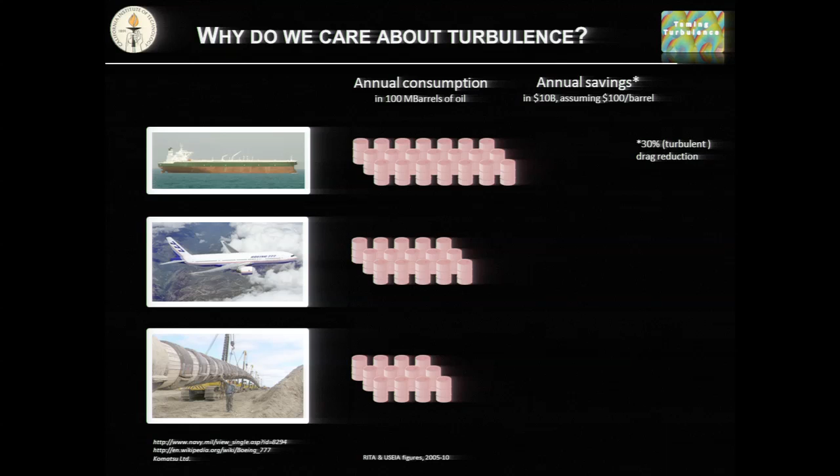But let's use that as a rule of thumb. The aircraft industry, Boeing, say you need at least 15% drag reduction for it to be an economically viable proposition to try and control the flow. So if we assume $100 a barrel and shoot for a 30% turbulent drag reduction, how much would we save? The grand total is $140 billion per year, only in these categories of flow I'm showing you here.

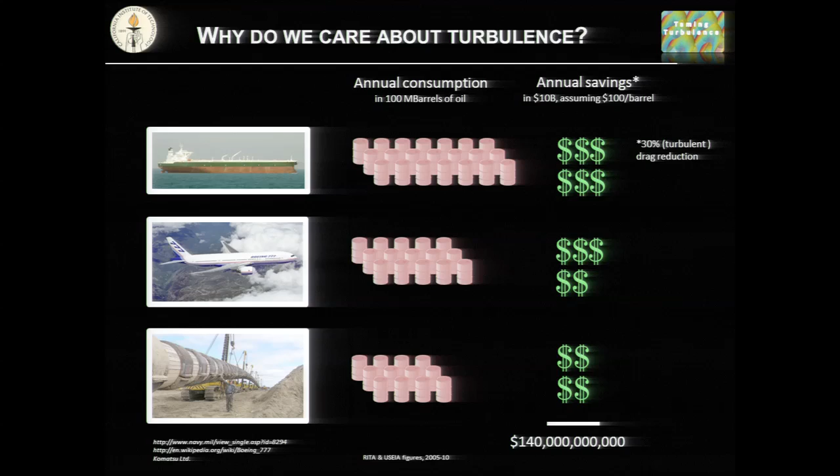Now, there are other categories we could think about. They're a little less clean in the sense that there are other factors at play. So these are the ones where turbulence is most dominant, but these are pretty enormous figures. The interesting thing is it doesn't matter how you're providing power to these vehicles—you may have read about biofuels being developed to power airliners. It doesn't matter whether it's a biofuel or Jet A fuel. If you can save up to 30% of whatever you're burning, that's a very significant effort.

And of course, there are other things that make us want to control turbulence as well. There are environmental costs, and noise is also associated with turbulence, jet noise, though not particularly close to the wall. But turbulence is a very interesting field, and it's also a very Caltech field. To quote one of the most famous faculty from recent years at Caltech, turbulence is the most important unsolved problem of classical physics. So that's a great challenge to work on as a professor at Caltech.

So when is a flow turbulent? I've told you a little bit about where the flow is turbulent. Let me tell you why it becomes turbulent now.

We'll start in 1883 with Osborne Reynolds, FRS, Fellow of the Royal Society, who published a paper: an experimental investigation of the circumstances which determine whether the motion of water shall be direct or sinuous—his term for turbulent—and of the law of resistance or drag in parallel channels. Here's his experimental apparatus set up in Manchester, England, with a very simple pipe flow arrangement where he controls the flow rate through the pressure head associated with this reservoir and a little valve here. Apologies for the quality of this—it's obviously quite an old figure from 1883.

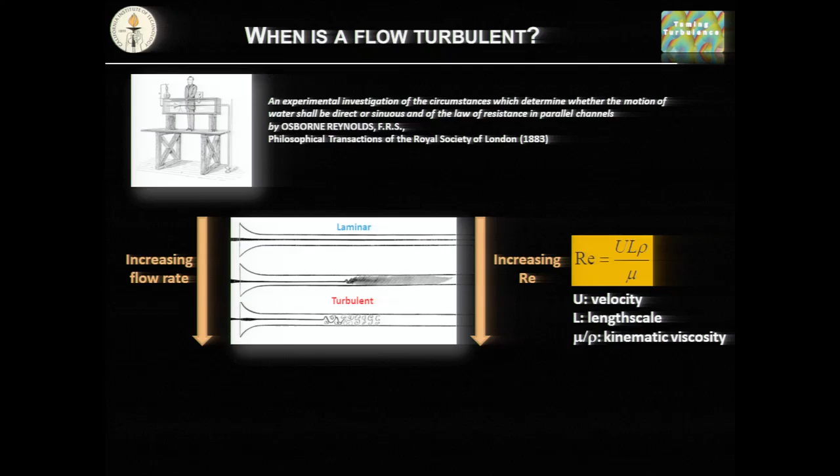As you increase the Reynolds number, at some point, inevitably, the flow becomes turbulent. The way it becomes turbulent is by amplifying very tiny perturbations that exist in the background somewhere associated with this flow. When the Reynolds number is low enough, the flow can damp out these perturbations. When the Reynolds number is high enough, it's a complex, fragile system that amplifies these disturbances, and things become apparently chaotic pretty quickly.

One other important thing about turbulent flow is that in a time mean sense, if I were to average this motion, I could come out with a mean velocity profile, and that's the thing that dictates the through flow rate of a pipe or the mean drag on a vehicle, and I'll explain that a little more as we go on.

But first of all, if we just take a cut through the pipe, the mean profile in the laminar case is parabolic, shown by this blue line here. In the turbulent case, you can see that it has a different shape. This red line shows the turbulent case, and it has a lower velocity on the center line of the pipe and a much higher velocity closer to the wall.

That's associated with the mixing, this three-dimensionality of the flow, mixing high-speed fluid from the core, the center of the pipe, towards the wall. It's particularly important because the drag, the skin friction as we call it, associated with this flow is dictated by the gradient of velocity at the wall.

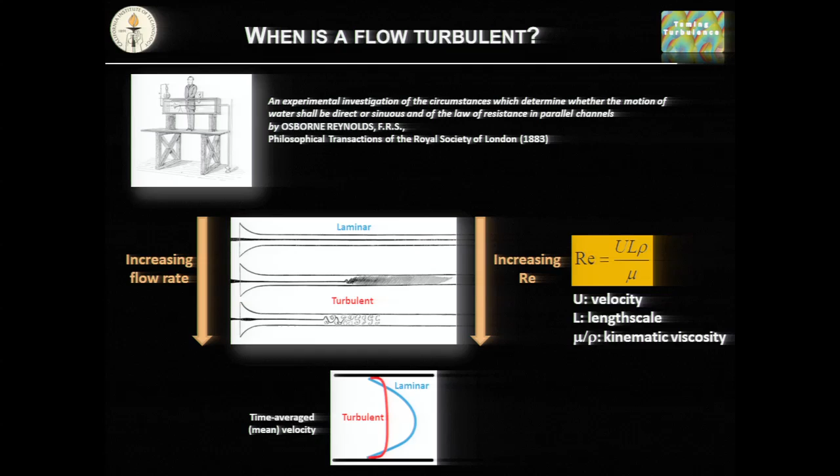So you can see that for the red case, there's a much higher gradient of velocity and therefore much higher drag. In pipe flows typical of industrial applications, you can have drag that is orders of magnitude higher in the turbulent case than in the laminar case if you try to get the same throughput in the pipe. So there are two ways to think about this: if I want the same throughput in a pipe, I need to work much harder in the turbulent case. Or if I fix the power I want to put in, I'm going to get much less flow coming through the pipe.

You may have encountered turbulence. If you poured a glass of water from the faucet, you already know a little bit about this transition. If you turn the faucet on just a little bit, the flow comes out very smoothly—it's a laminar flow. If you turn up the flow rate, you start to see a turbulent jet. It's not a wall flow in the sense I'm talking about here, but you're probably familiar with this phenomenon.

Now let's talk about how we observe turbulence. As Professor Ravichandran introduced, I'm very familiar with laboratory and field experiments in turbulence, in wall turbulence. On this spectrum of Reynolds number—a definition I gave you earlier—here's the division between laminar and turbulent. The work of Osborne Reynolds sits to span both conditions through the transition from laminar to turbulent. Down here, I'm not going to talk about laminar flows much, but things like blood flow and flow around bugs and birds reside in that section of the diagram.

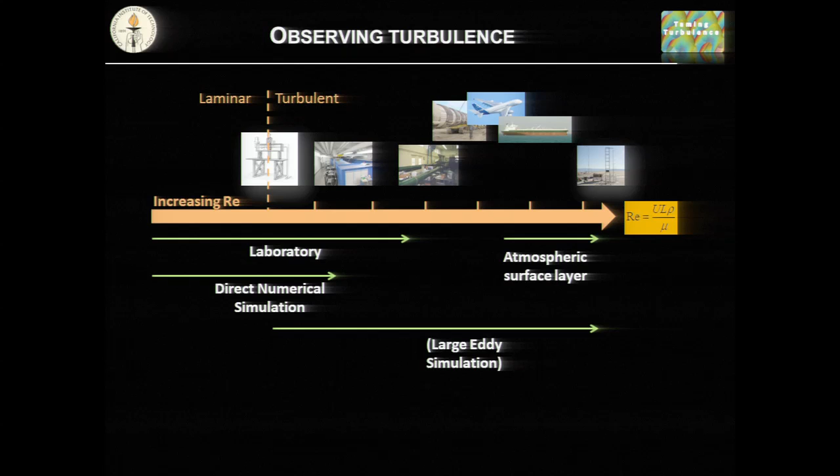So there is a big gap here, unfortunately, just about where some of these applications sit. And it's not just a big gap on my diagram, it's a bit of a gap in our understanding of the way turbulence works too. You would think being able to make all these measurements in controlled facilities, we would know how turbulence behaves. It's very complicated. That's why 130 years after the transition to turbulence and the Reynolds number was really introduced in a formal way, we're still working on it. Let me show you a little bit of why.

Turbulence is three-dimensional, it's chaotic, and yet structured. What do I mean by that? Well, here are some time traces of the velocity. This is actually from the surface layer of the atmosphere, and this is 10 seconds of time, and these are 4 time traces, a factor of 10 difference in height from the wall. This one is at a log of the distance from the wall of 1, so that is about 5 millimeters from the surface of the Earth. This one is about 50 centimeters, 5 meters, and further up than that. So what do you see here?

Well, you see a lot of activity. Looks like the type of thing you don't want to see when you go have a cardiogram done, right? There's a lot of very small-scale, rapid fluctuations, and there's some large-scale activity too. These are synchronous time traces, so you can see there's something interesting going on between about 82 and 86 seconds here, something a little more quiescent in the signal. There's a large-scale negative excursion below the mean. These are all fluctuations relative to the time mean, and it seems to be correlated across these heights. There's a variation in the activity of the turbulence level between these periods as well. So there's some kind of structure that you can see visually.

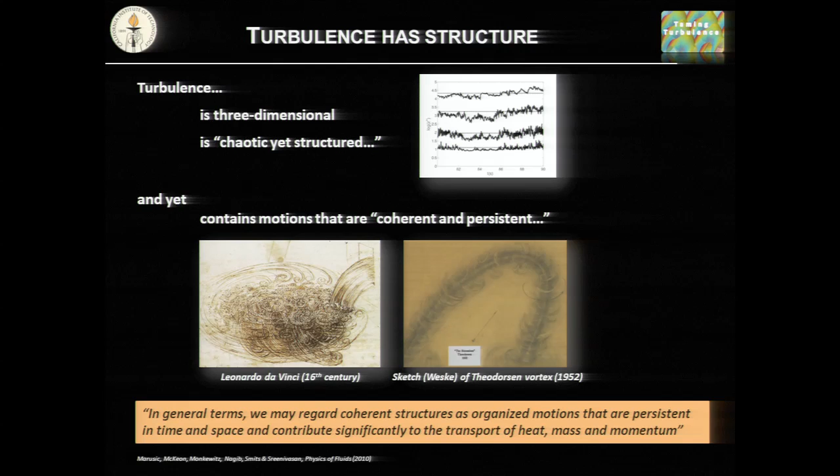It's still somewhat controversial how clearly we see these things in wall turbulence, but it turns out to be a very useful building block for understanding wall turbulence. These are coherent motions - coherent structures, organized motions that are persistent in time and space, so you can see them, and they contribute significantly to the transport of heat, mass, and momentum. So they're dynamically important, and they stick around long enough for you to see them.

Of course, wall turbulence has some special structure. I'm going to walk you through a snapshot of the history of this and some of the observations of turbulence we're familiar with. Hopefully you'll see there's a great history at Caltech - in fact there are so many contributions from Caltech I won't be able to put them all on the slide. So consider flow over a flat plate.

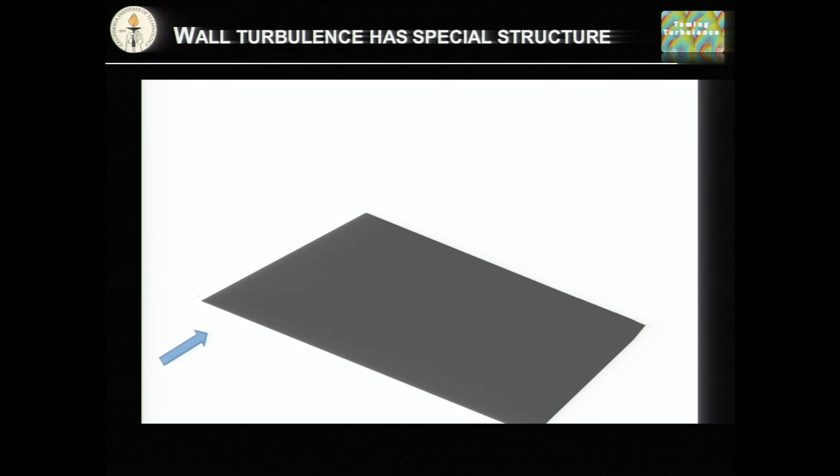Here's the plate, here's the direction of the flow. When I describe to my non-scientific friends what I do, I can say I study flat plates with air flowing over them - doesn't sound very glamorous, so you have to use your imagination. Think back to the large things I started the talk discussing. But here's the flat plate - this is the type of thing we like to put into a wind tunnel because it's a very simple configuration.

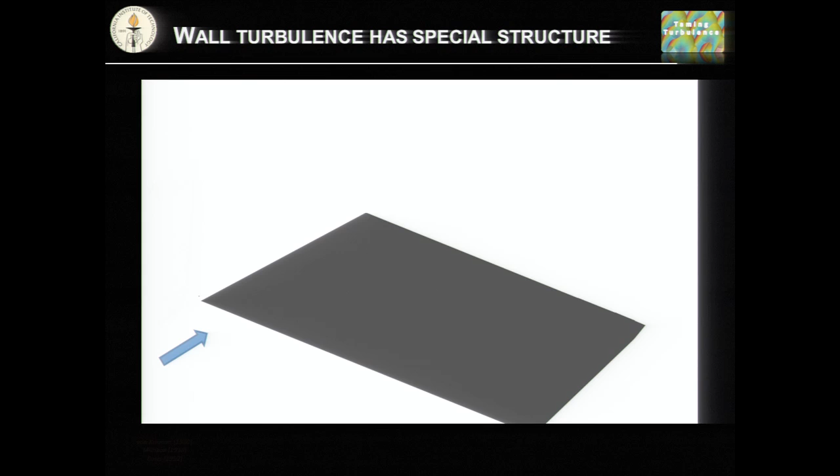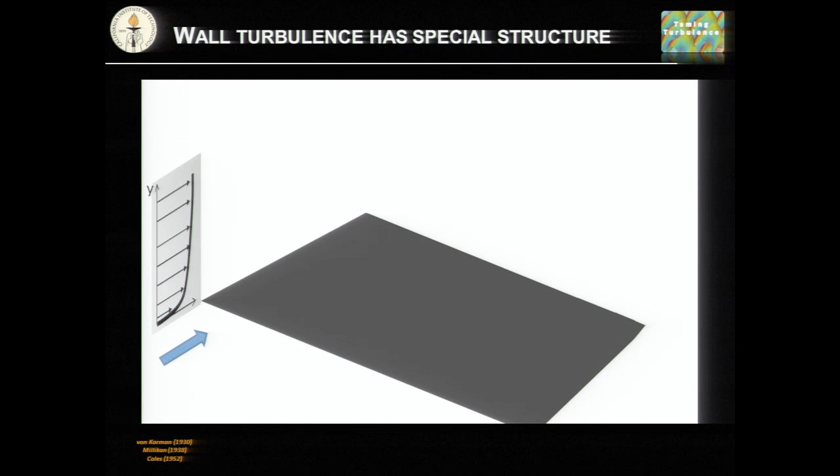Early on, people understood the profile of the mean velocity - the time mean. Remember that the gradient of the velocity, here's the velocity curve, the variation with distance from the wall y, and the gradient here is what dictates the skin friction, or shear stress, the drag associated with the flow. There were contributions from Theodor von Karman, the first director of the graduate aerospace laboratories at Caltech, aeronautical laboratories as they were then, in 1930; Clark Millikan, second director of GALCIT; and Don Coles, current emeritus faculty at GALCIT. There are many others on campus - my apologies if I ran out of space on the slide. So that's the mean, but the mean velocity tells us the least about what the turbulence itself is doing.

So in 1967, Kline et al. did some very nice experiments where they were able to visualize a bit of the turbulent motion. This is a visualization technique called hydrogen bubble visualization - there's a thin wire, with three planes, so the wire is put at three different heights from the wall, and hydrogen bubbles are released from the wire.

It's better to start up here - you can see these nice straight lines of hydrogen bubbles, which are illuminated so you can see where the bubbles go. If there's no turbulence, everything's laminar and smooth, the bubbles travel in straight lines, and you'll see the same striations close to the wire. Now if we go back to the plane closest to the wall, you can see that's not the case - there's some very intense motion moving these bubbles around.

Close to the wall, the bubbles get grouped into what we call streaks - that's consistent with motion parallel to the wall, grouping these bubbles together. Then these bare bits here are consistent with motion out of the plane or into the plane, so wall-normal motion. We understand now, and some of these authors were able to suggest these ideas, that there are vortices aligned with the plate moving these bubbles around, and that's a very important mechanism close to the wall.

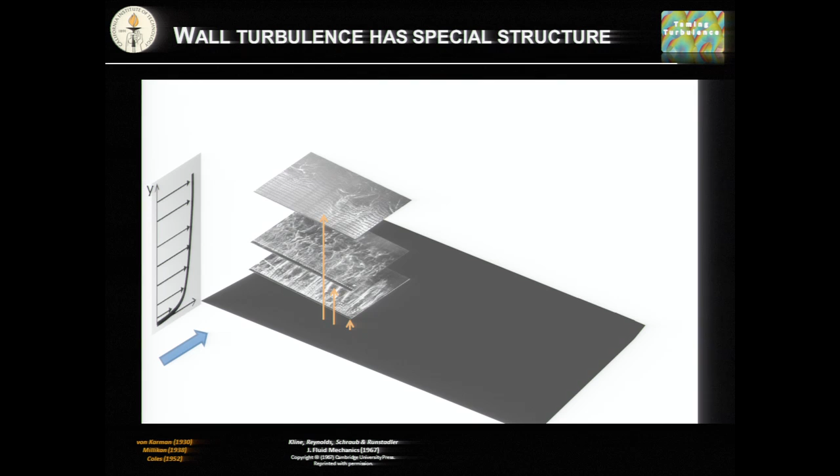These bubble lines are undisturbed, and then you get some intense activity here.

With the advent of laser technology, the community was able to make additional observations of turbulence. Here's a beautiful image where dye was introduced to a water boundary layer and illuminated with a laser. The time mean masks a lot of intricate features associated with the edge of the boundary layer. There's what we call an intermittent edge, so it doesn't just sit at a constant height. The yellow demarks the fluid that is turbulent in the boundary layer, but sometimes there are excursions of unmarked fluid right down to about half the boundary layer thickness. So you can see why this top plane looked relatively unperturbed, because it was mostly out of the boundary layer, and then occasionally it would intersect with one of these lumps or bulges, as we call them in the flow.

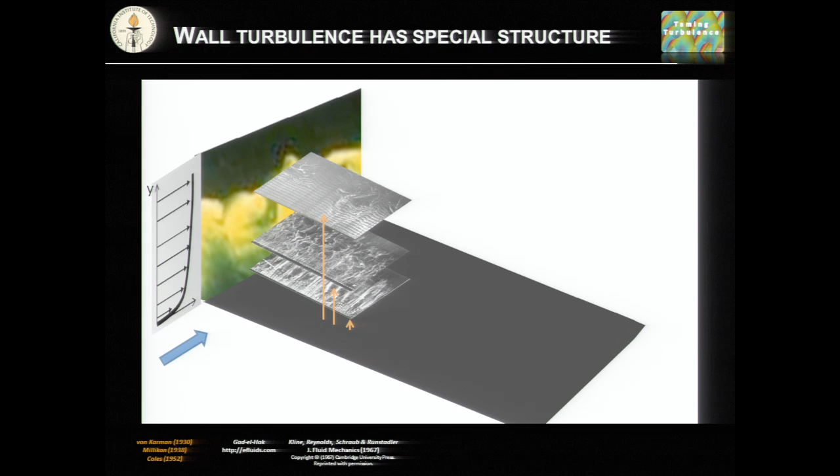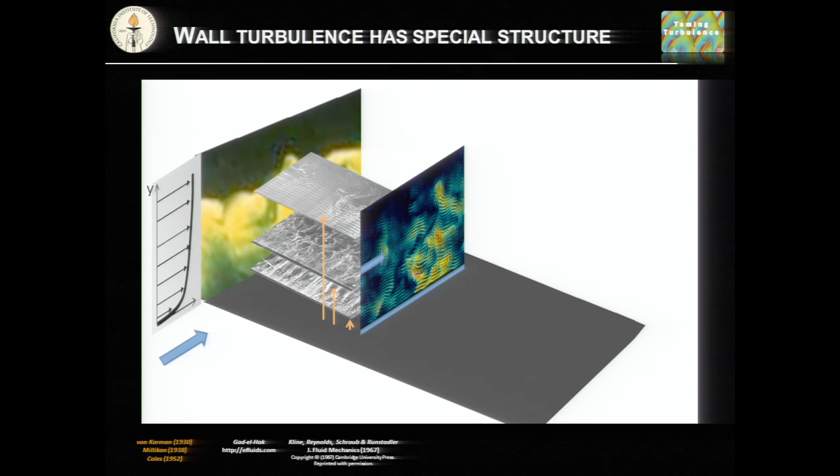We're getting some picture together of what the boundary layer actually looks like. We can go a step further with a technique called particle image velocimetry, which I will sketch out shortly. For now, this is an image of the velocity field in a wall-normal streamwise plane, where these colors show arrows indicating the velocity of the fluid in that plane, streamwise or wall-normal, and the colors dictate the intensity, or amplitude of that fluctuation. So you can see it's pretty complex.

If we look at a similar technique in a wall-parallel plane, about the same height, the arrows show fluid moving slowly relative to the mean in a turbulent sense, very complicated snake-like shapes here. The colors show the footprint of vortices, of swirling motion in that plane. They're dotted around. Red is clockwise and blue is the other way. Blue is clockwise and red is anti-clockwise. But there is some kind of grouping of these around these low-speed structures, and that's a feature we see quite often.

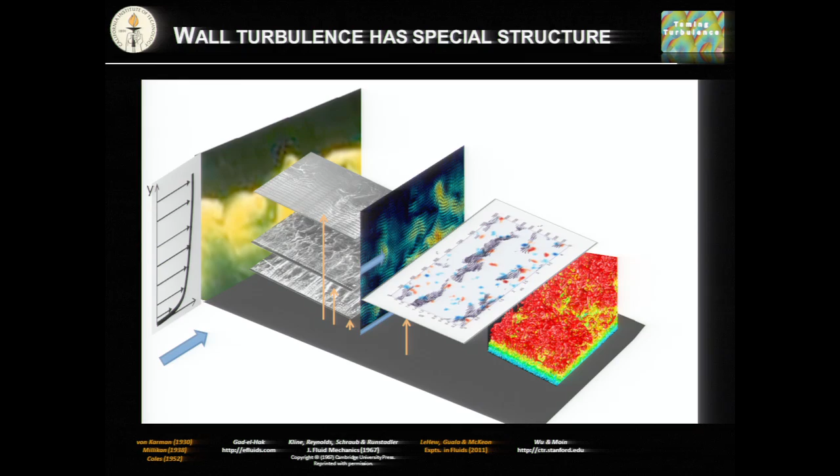The last piece in the puzzle here is direct numerical simulation. What's that? Well, it's been described as a forest of hairpin vortices or a sea of worms, depending on how you want to describe it. But this is the output from a full simulation. Every scale is replicated, and you're seeing here the vortex structures, the swirling structures picked out of this simulation. They're colored by the speed of the fluid at different heights from the wall. So if you get nothing else from this picture, it's complicated, okay?

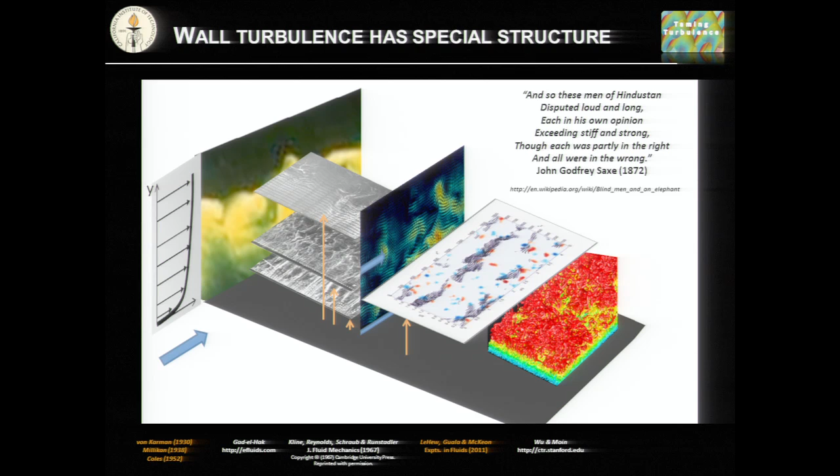So how come we haven't made so much progress in this field? I love to cite John Saxe's famous poem about the blind men describing the elephant. These men of Hindustan, read the community, disputed loud and long, each in his own opinion exceeding stiff and strong, though each was partly in the right and all was in the wrong. If you imagine trying to describe an elephant, you're seeing one of these views and trying to extrapolate and understand the whole flow. Even when we have all of these images associated with the flow, it's still hard to understand what the flow is doing, and particularly to extrapolate that understanding to geometries and flows different from this lovely flat plate. Remember, you're using your imagination—it's not just a flat plate, but even so, to more complicated flows. And particularly, it's hard to extrapolate to higher Reynolds numbers.

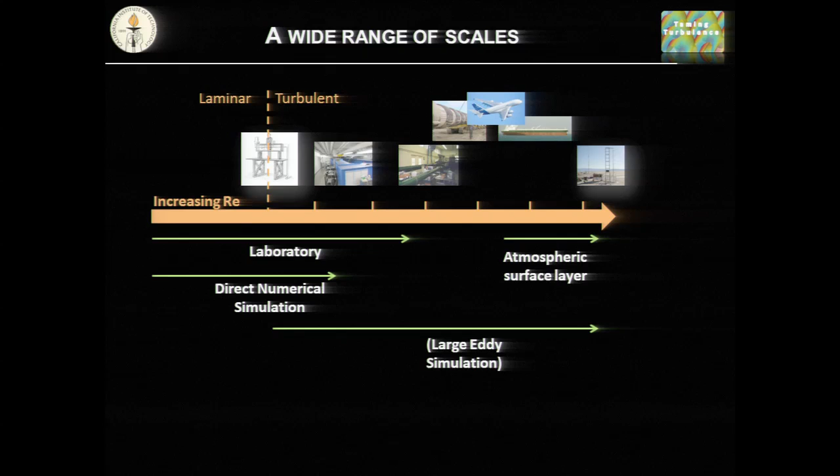So if we go back to the range of scales, I'm going to tell you a little bit about why it's hard to extrapolate in terms of Reynolds numbers. If we consider this wind tunnel laboratory facility, the plate we work with is about as high as from my feet to the tip of my finger, so about 2 meters long. The boundary layer, that region in which the turbulence is confined, is about the height of a golf ball. So it's already a pretty big range of scales. If you want to understand the whole flow, you need to make measurements over that.

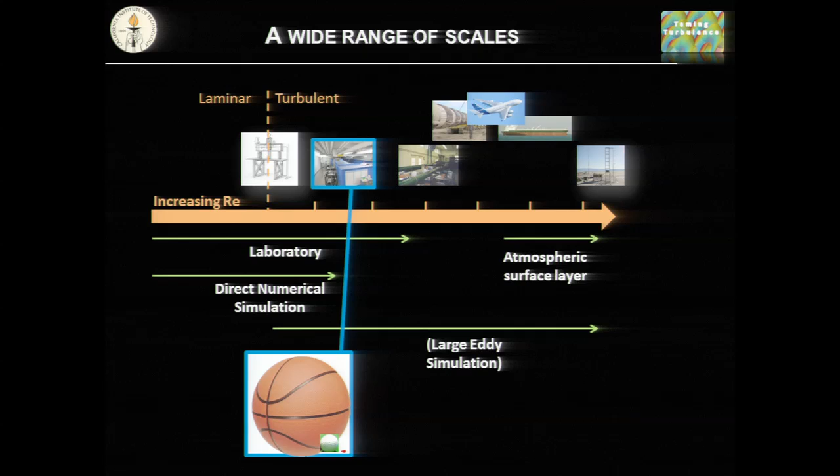It gets worse, okay? So let's now think about the world's largest supertanker, the Seawise Giant. It's actually out of commission right now, but it was 458 meters long—that's the height of the Empire State Building, okay?

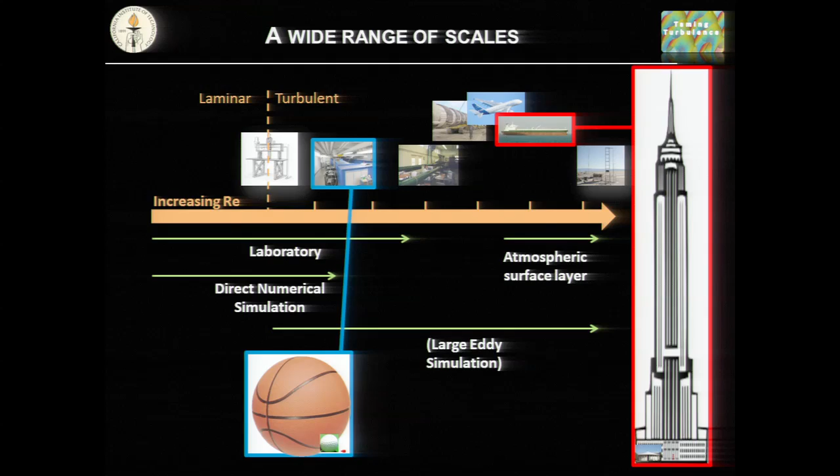So if you want to simulate the flow around that, that's a pretty big simulation right there. Now, the boundary layer on that, see this little red person? That's the tallest female US citizen, Sandy Allen. She was 2 meters and 24 centimeters tall. That's almost exactly the thickest boundary layer that you would observe on this very large tanker.

The longest scale of motion in the turbulent boundary layer is the height of this auditorium, 20 meters. The smallest scale is thinner than the thinnest of Sandy Allen's hairs. So you need to be able to measure, see, resolve, simulate from the thickness of a hair at least to the height of the auditorium. And if you want to understand more than just a little piece of this flow, you want to be able to simulate up to the top of the Empire State Building. So again, if you take nothing else from this slide, this is difficult.

So I've told you a little bit about the economic and the environmental drivers to control flow. So it seems as though there's a lot of promise here. We ought to be able to do quite a lot.

So what do we need for a flow control scheme, a way to make the flow do what we want it to do? Well, the first thing is it needs to be efficient, and you'd be surprised how many people fall at the first hurdle here. So any scheme to control a flow, to try and reduce the fuel burn or the energy associated with a vehicle, needs to use less power than it saves. Think about it, it's important.

There is some element of science versus engineering here, so even showing that you can control flow is quite a significant step forward at this point, but if it's ever going to go into application, you can't violate that first one. The scheme needs to be adaptable, so it needs to work under different flow conditions. We think about individual flow speeds in the wind tunnel, and that's a very nice laboratory setting, but of course that's not what happens in the real world. And it needs to be robust, so wind gusts on an aircraft, that sort of thing.

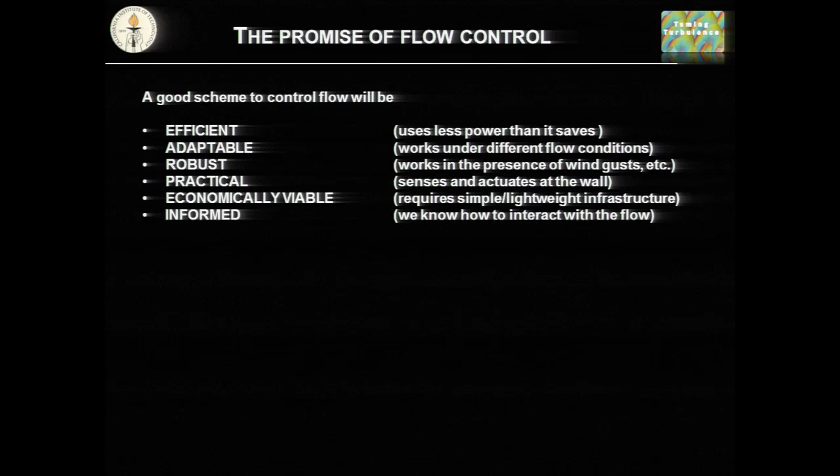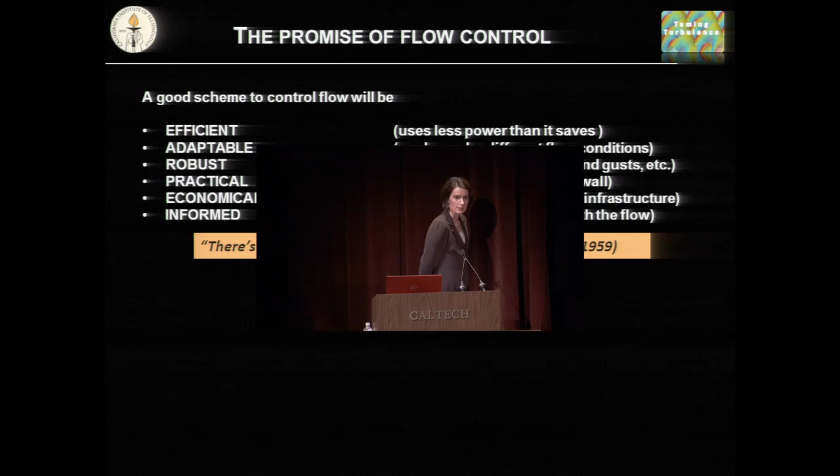It needs to be light and simple to make it economically viable. And the hardest bit really is that it needs to be informed, so we need to understand some more about the flow to really make this a practical idea. To quote Feynman again, there's plenty of room at the bottom, so we can make things that are small enough to interact with these smallest of scales in the flow. And here are some examples.

So on the left are active dimples. These little circles in a wafer, this is a 4-inch wafer, these guys are flat until you actuate them, and then they look like little blisters. They pop up. So if you think of a dimple on a golf ball, this is going the other way, so this is really a pimple. So dimples down, pimples up. These are active dimples, one way of interacting with a flow passing over the top.

But to do that, you need this pattern of electrodes. It's a very intensive manufacturing process, but you can do it. And these are a few millimeters across, you can make them smaller. On the left, that was work from Imperial College London. On the right are some sensors, nicely photographed to give you a sense of scale. These are of the order of 0.5 millimeter in diameter, or in cross-section. You can make them down to a few tens of microns in cross-section.

These are shear stress sensors, little floating devices, and as the fluid exerts a force on them to move them in plane, you get an electrical signal out from little tiny strain gauges that tell you what that force is going to be.

What's the problem? Well, here's the A380, one of the largest commercial airliners in use right now. If I actually want to control everything on this airliner, then I need both actuators, there are many other options, and sensors, in a pattern, a repeating pattern that's somewhere between 1/4 of a millimeter in scale to 1/10 of that. So very, very tiny units that contain at least one sensor and one actuator each. If I cover the whole aircraft, so just fuselage and wings, I need, any guesses? 20 billion.

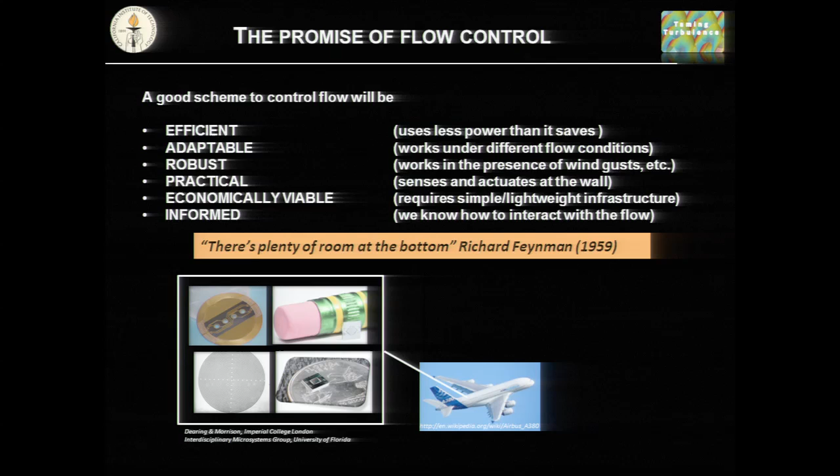I like to call this the fitting the squid into the box problem. While I'm busy concentrating on this arm, there's no guarantee that this leg is not coming out of the box the other side. So if we want to do something like this, I would argue we need to understand the physics some more.

One of my favorite expressions since arriving at Caltech, and this is sometimes used in the context of trying to get Caltech faculty to meet, is herding cats.

So on the left here, think of the cats as individual parcels of fluid. I want to force them to do something that I want them to do, in this instance, get them into a pen. These cats all have things they want to do, whether it's go eat, chase this lovely looking mouse, or sit on the cushions in the sun. If I want to get these cats to go into this pen, I probably need at least one person to move each cat, because I'm trying to get them to do something they don't want to do.

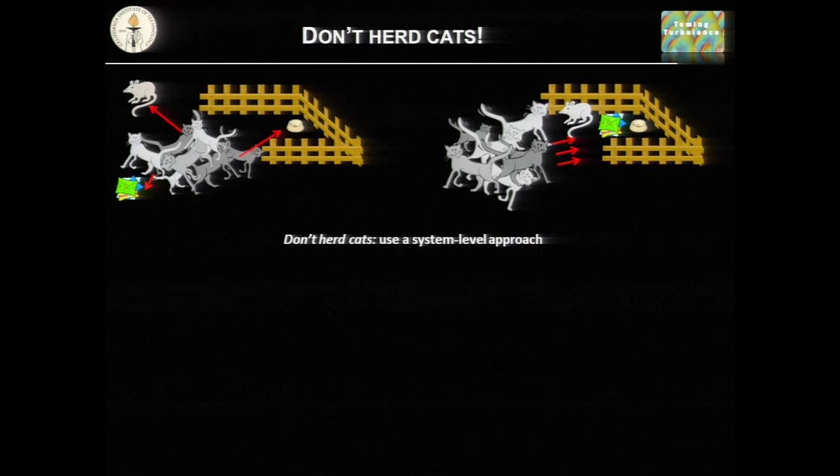So don't herd cats. Let's use a system-level approach, understand what the cats actually want to do, and encourage that. If I were to move the mouse, the pillows, and the food into the pen, then the majority of cats would probably go that way. There's always one, right? So it's not a one-person job, but it's certainly easier.

So the idea here is rather than use the hammer approach of billions of sensors and actuators, I want to tickle the flow. I want to just move it slightly, make it think it's doing what it wants to do, but actually have it do what I want it to do. So to do that, we harness something that's innate to the flow.

One of the tendencies of the flow we already know about is to respond acutely to surface roughness. Here are some examples. This is an Arleigh Burke-class destroyer in the US Navy, shown here in dry dock. You don't get a lot of detail, but hopefully you can see there's all sorts of what we call biofouling. These ships go out to sea clean, and during sailing they get weed and little creatures attached to them, which in my language is roughness. So the surface that was nice and smooth becomes rough. The Navy has a categorization for the different types of biofouling you can observe.

Fouling rating 30 is heavy slime. Sounds pretty unpleasant, but it's actually seagrass and lovely little creatures called sea squirts. Then higher up is fouling rating 60, these are small calcareous fouling or weed, barnacles with a quarter inch height or less. So still pretty small deposits on the surface of the ship.

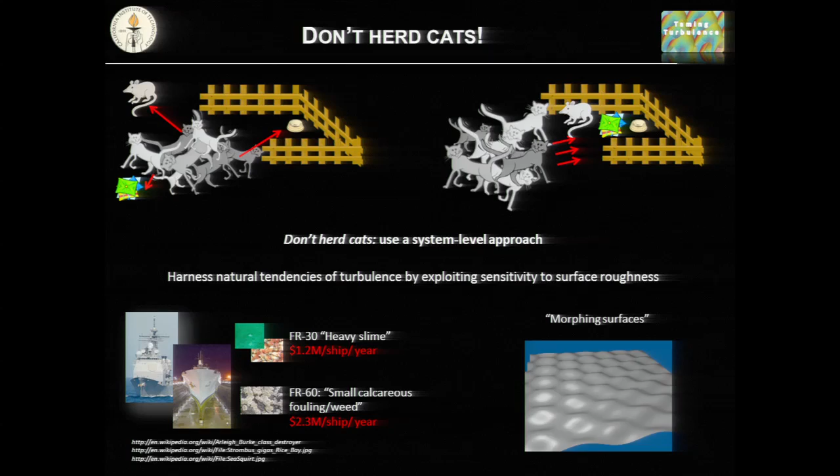So here's a little cartoon to keep you in mind of what I was saying. Very simplistic, in that there's one scale in both the streamwise and cross-stream direction, and this amplitude oscillates in time. We call these morphing surfaces. I'll tell you more about how we make these later on, but this is how we're going to try to interact with the flow.

Let me skim through how we decompose turbulence first. Here is a velocity trace, the streamwise velocity fluctuation in a water channel here at Caltech, with distance along a surface. If I wanted to characterize that, my human brain can't really process exactly what that trace looks like. So if I want to break it down into known quantities so I can compare it with other flows, I might try to say it looks kind of like that green trace as a first approximation.

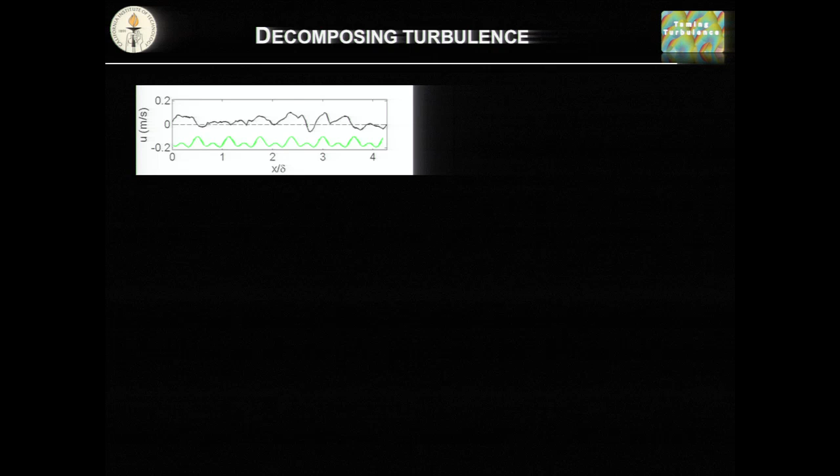You can see that green trace approximates quite well for some regions of the flow and gets it wrong elsewhere. If I look at the blue trace, a very simple sinusoid, that does better here, worse there. But if I sum them together, I get a more complicated pattern. You can imagine doing this with increasing numbers of simple waves, sinusoids.

All I need to record is the amplitude of each wave and the phase, meaning where the first peak occurs in space. There's a theory, I won't bore you with the details, but it tells you that you can exactly reconstruct the signal with the right number of samples as a summation of this type of wave. So if I record these waves, I can match different signals and pick out patterns that I can't pick out with the human eye.

Problem is, that's a one-dimensional velocity signal, in one dimension in space, but there are three dimensions. And I have no time information in there.

So here is what the velocity field looks like at 30% of the boundary layer thickness, 30% of the full region of turbulence from the wall. This is the trace I showed you on top, and it corresponds to the velocity along this line here. This is streamwise distance, this is spanwise distance. Red means a velocity fluctuation higher than the mean, blue means one slower than the mean.

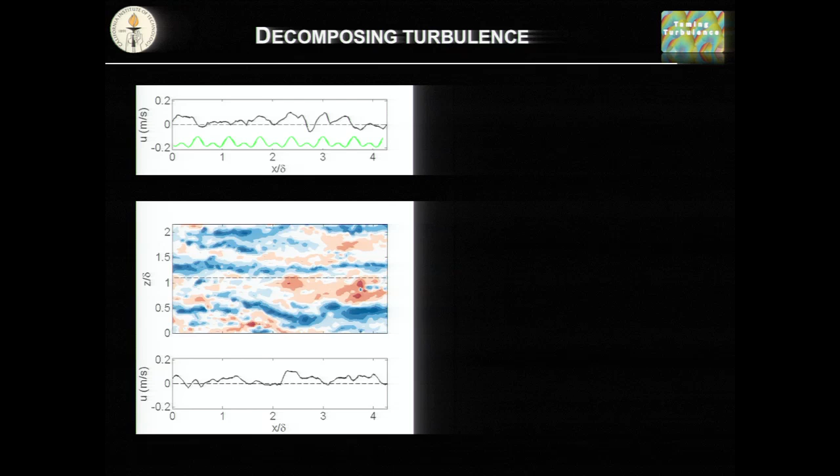So if the movie runs, here we go. This is time information, much slowed down. This data was obtained at 1,000 cycles per second. Hopefully you can see that things are complicated up here, but also that while some features convect, meaning the shape just travels downstream - this peak is pretty much just traveling downstream - there's also what we call evolution, where the shape is also changing in time. So I also need to account for the time variation.

If I'm going to think about this flow in terms of traveling waves, I need to be a little smart. You may be familiar with the simple wave equation that says the velocity of a wave is given by the product of the frequency and the wavelength.

So here are some very simple waves. Here's wave 1, which has twice the wavelength, the distance between peaks, that wave 2 does. If I add them together and they have the same convection velocity, I get something that looks like this. If I add more waves, I can get very complicated shapes. This is the type of idea behind acoustics, where all signals travel with the same speed, the speed of sound.

However, there's no evolution of this signal. So if I want evolution, I need to consider waves that travel at different velocities. Here's one where wave 1 is traveling at twice wave 2. If I sum them, I get a signal that's evolving in time. Again, if you put enough frequencies together, I hope I can convince you that you get back to something that looks like this. So how does this help us?

Well, we need to extend this to have wavelengths in the streamwise direction, the spanwise direction, a frequency and time, and since this is 2-dimensional, I need to think about the direction out of the screen as well. So it's pretty complicated, but it turns out to be quite useful.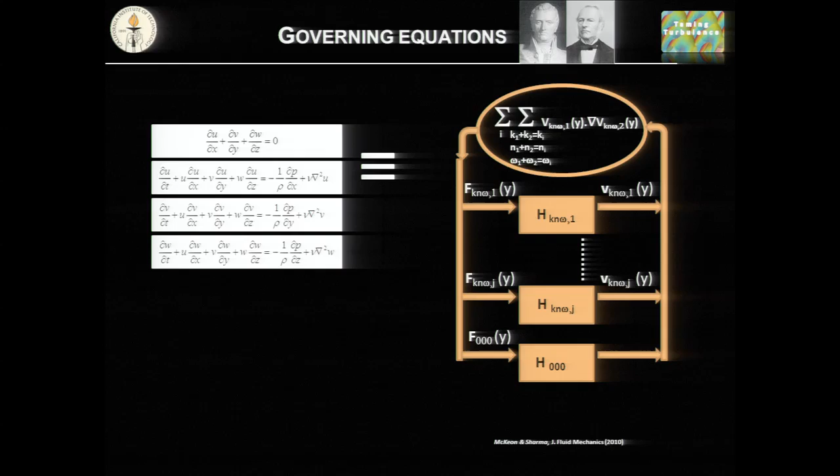So this is a pretty complicated diagram, but the essence of what I'm trying to say is that I can think about this flow in terms of traveling waves. By doing that, I can break this down and consider just one of these blocks at a time. And if I do that, I actually find in my formulation here that it's not as complicated as I would have thought starting from these equations.

So I can make an analogy here to trying to understand flow around the body. If I want to understand blood flow, I can either try and model all our veins and arteries, and it would be a very hard problem, or I can say the majority of the flow goes through the largest veins and arteries. If I just understand those, I'll get pretty close to what's actually going on. I can do that with these individual transfer functions too. That was the mathematical simplification that this formulation permits.

So if we see how good this analogy is, here, this is analyzing one of these transfer functions, and I call it test tube turbulence, because we can separate out these little boxes now, these transfer functions, and understand how turbulence fits back together. So if I analyze one of these boxes, I can get some statistical results which are quite promising, but the neatest thing that we found is that we can also regenerate these arrays, in the streamwise direction, arrays of hairpin-like vortices.

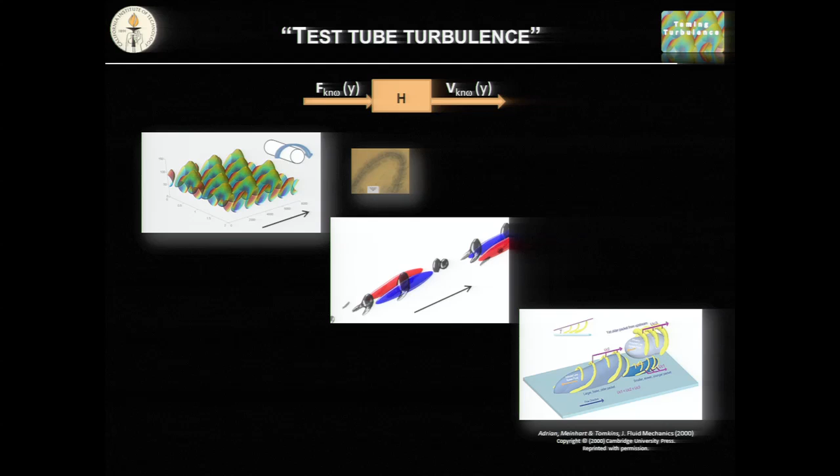So here's the sketch I showed you early on. If we start to sum more than one of these little boxes, we can get arrays of these hairpins that appear to grow in space and appear to straddle low-speed velocity regions. I also showed you an image that implied that before. And that's consistent with the state of the art in the field, which tells us that these hairpin vortices are aligned with low-speed regions, and they form these kind of packets. So it's promising. It's yet to break this model, in fact.

So that's quite good, but you may say, so what? Well, let's go back to the analogy of the body. If I really wanted to see where the blood was going in the body, then I would tag it. I would put in a tracer. That's probably, I hope there's no doctors in the audience, it's probably a really bad place to put a tracer, but bear with me.

So this green blob, I put it in here, and it would travel around the body, and I would be able to see where that blood was going. I can do this with my little model over here - if I override the natural forcing, I can inject something here, then see where it goes around this loop. And it allows me to see what the pressure points are that will allow me to change this flow.

The way I do that is from the wall - that little egg box cartoon I showed you is very simple, but it allows me to pick out k, n, omega, this particular combination of parameters, and couple that to what the flow is already wanting to do.

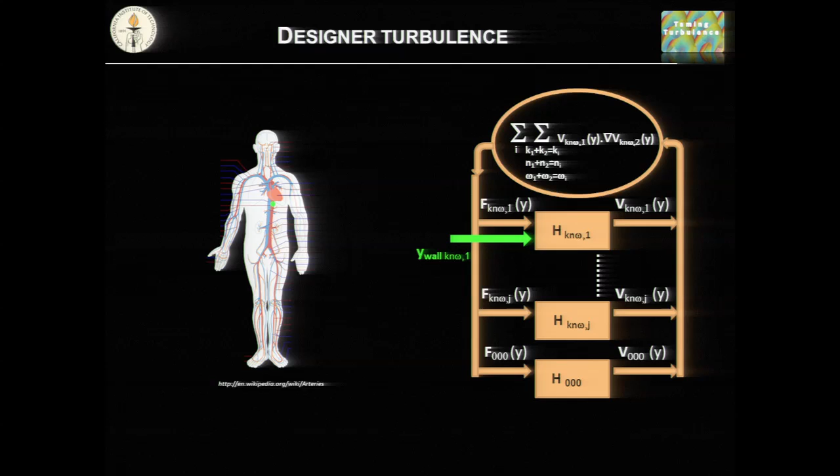So now let me quickly show you how we do some of these experiments. We work in the Merrill laboratory. If you were to go to Guggenheim, the building on the south part of campus, and go in the doors, you would see the bust of Theodor von Karman, first director of GALCIT.

We saw his name mentioned with regard to the mean velocity profile of turbulent flows. And if you went downstairs and through some doors, you would find the Merrill Laboratory.

Here is a picture of Albert Merrill, for which the laboratory is named. He was a very important figure in the history of GALCIT, one of the first instructors in aeronautics. He brought the first wind tunnel to the west coast, up at PCC as it is now. The neatest thing about Albert Merrill is that he learned to fly with the Wright brothers.

This is Wilbur Wright here - a wonderful piece of aeronautical history. So it's an honor to be working in a laboratory with his name on it.

So there's the Merrill Lab - here's what you would see if you went in the door. This is the plan of it, this is the wind tunnel. The flow goes anti-clockwise around the loop here. There's a fan in this section which drives the flow, and there's a test section 8 feet long right here.

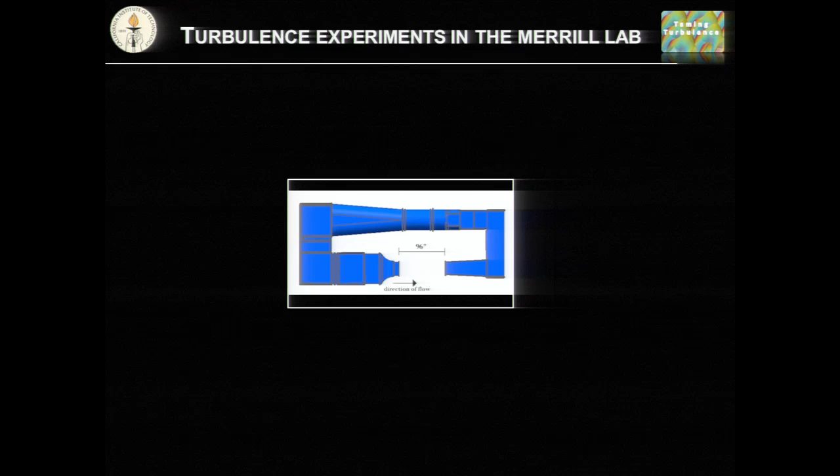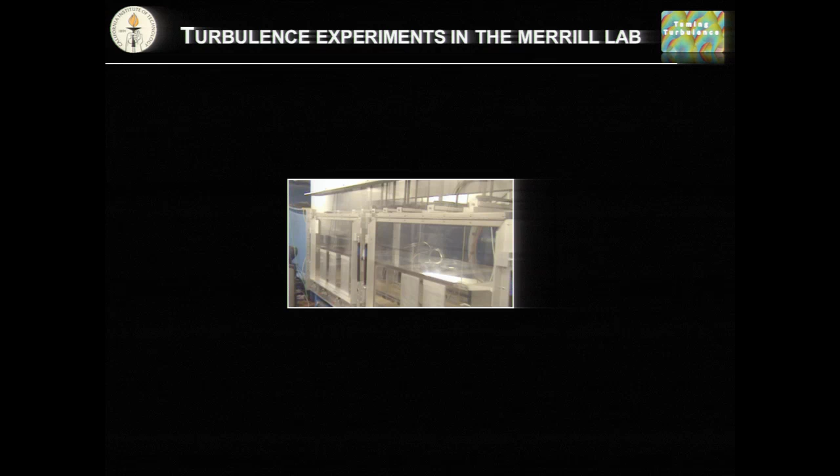This is what it looks like, looking diagonally up - the fan is behind here, and here's the test section. If we take a look at the test section, here's my flat plate. Remember, be creative - this is not just a flat plate with air over it.

If we look a little closer, we'll see some of the diagnostics that I'll talk about - that's the view downstream. We have a plate suspended halfway up this test section. Here's the diagnostic, you can see a laser beam there, illuminating some particles which track the motion of the fluid. There are two probes here also.

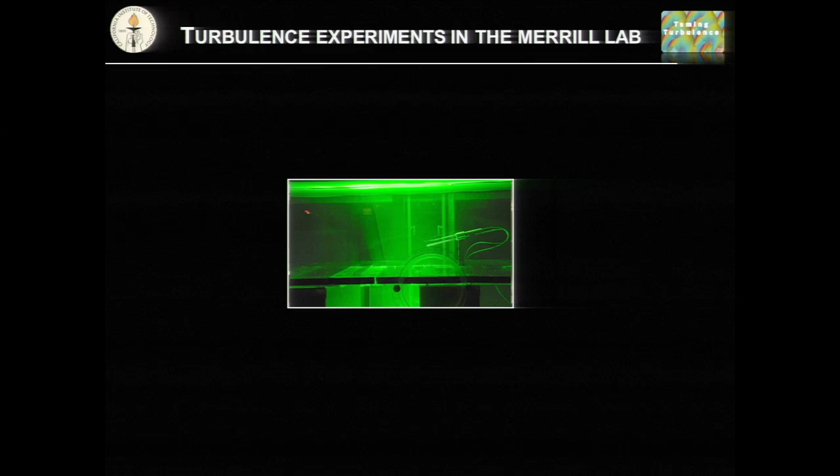One measures pressure, and if you combine an isentropic deceleration of the flow with a measure of the static pressure of the flow, you can get the mean velocity out - that's one of Bernoulli's equations. The second probe is a device we use to measure the instantaneous velocity by heat transfer. We heat it, and the way that it cools gives us an instantaneous, or at least very fast, response measurement of the instantaneous velocity of the flow.

Let me talk briefly about particle image velocimetry. There's illumination of the particles in the flow. If I have a camera that has exposures every 1,000th of a second, and I illuminate those particles in the flow separated by 10 millionths of a second, then I can get a reflection from the particles. Here's the first image, here's the second image. If I track where each particle has gone, the change in the streamwise direction and the change in y, then I can get the velocity in two components. That's what we call particle image velocimetry.

Here's another feature of this flow - this is the way we introduce our morphing surface. We do it mechanically right now, with four little ribs that we can move up and down into the flow. This is two-dimensional; the cartoon of the egg box is a little hard for the first experiments. I'll show you some simple results from this.

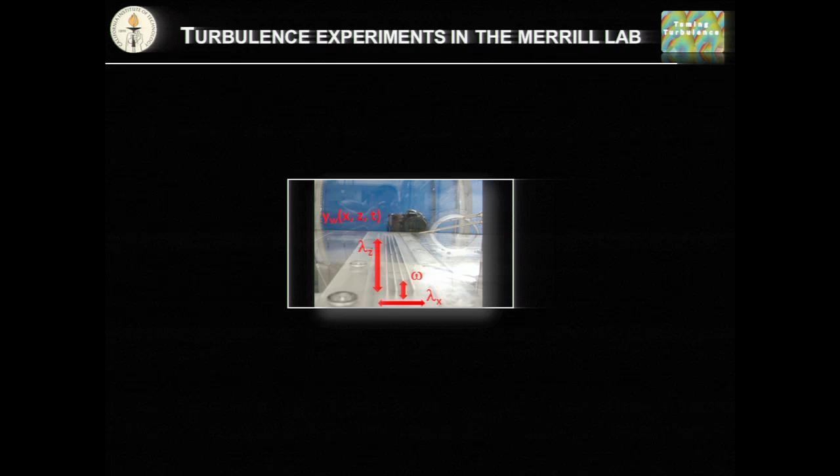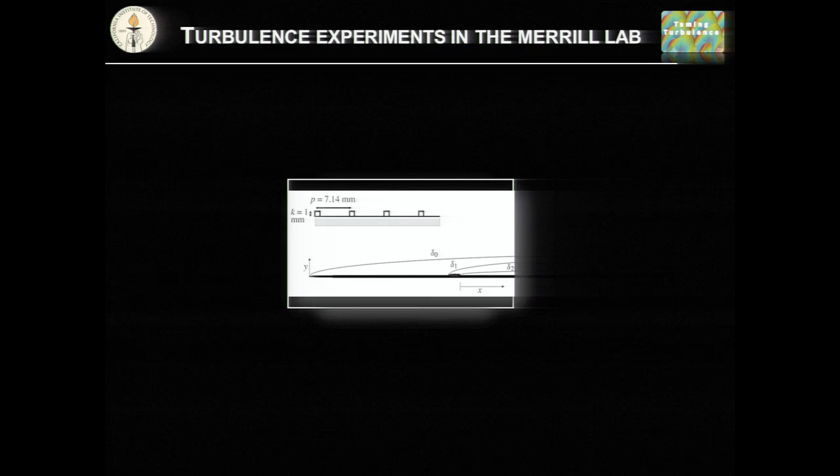So these are the scales that we introduce to the flow. Here's the schematic - it's a very short patch of roughness, and we look downstream of this to try and understand the way the flow has responded, to see whether we can excite these modes and do this test tube manipulation.

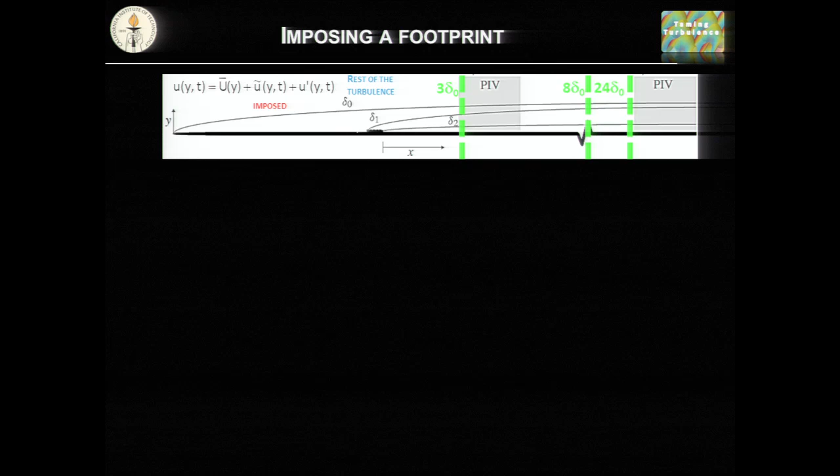Here's a schematic to orient you to what I'm going to show you. I'll show you measurements at 3 times the boundary layer thickness, 8, and 24 boundary layer thicknesses downstream. I'll break down the velocity into a time mean, a component at the frequency at which I'm actuating the flow, and then the rest of the turbulence. The physical frequency is 30 hertz, and these elements move 1 millimeter high in a 20 millimeter boundary layer, about 5% of the boundary layer thickness.

Let me show you what we put into the flow. We can get this out by what we call phase locking, so we just average relative to the position of the roughness. We can average from when the surface is flat all the way up to when it's fully deployed and back down. So what this shows us is exactly the disturbance we're putting into the flow.

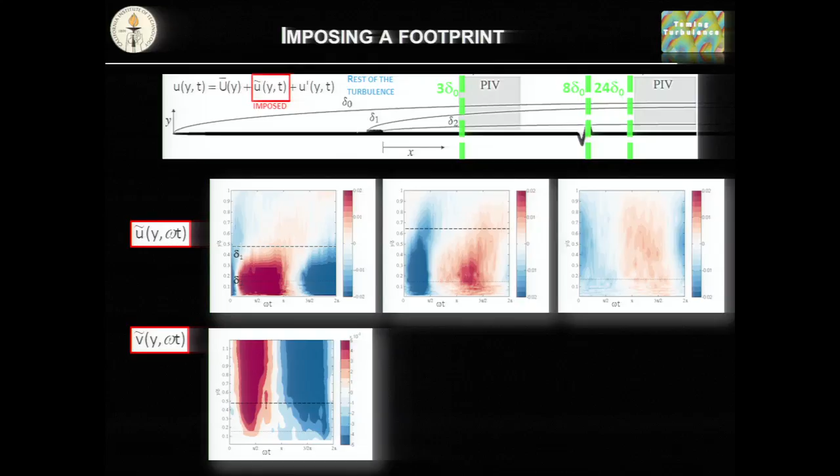Hopefully you can see that in the streamwise component U, and the wall normal component V, we're putting something very strong into the flow. U has a very complex shape, but it persists even 24 boundary layer thicknesses downstream. That's encouraging — we don't need 20 billion actuators on our A380. V looks kind of different, associated with these ribs going up and down. Red is a fast fluctuation, and blue is slow.

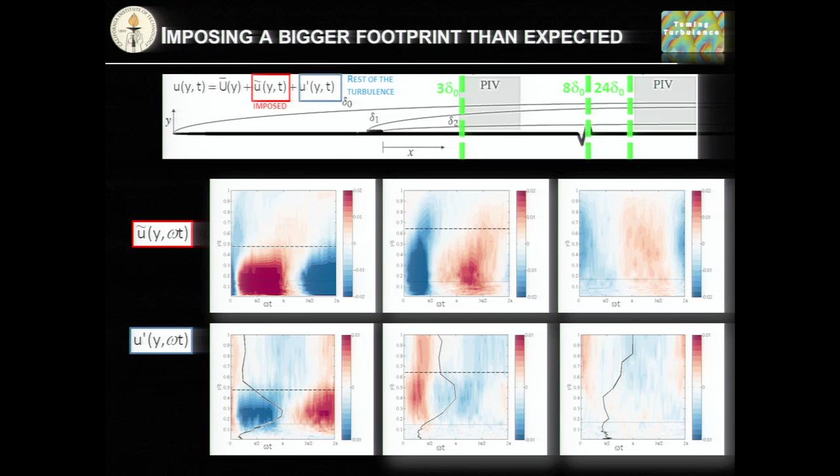Let's look quickly at what happens to the rest of the turbulence. We expected to see something associated with the 30 hertz, but we also see that the rest of the turbulence sees this footprint from what we're putting in at the wall. So what we're putting in is sort of the puppeteer — it's controlling the rest of the turbulence. That gives us a bigger footprint, more control over the flow than perhaps you would have anticipated, but it tells us that we're doing pretty well.

The acid test is whether we can predict this shape with the modeling I showed you before, and it turns out that we do pretty well. Starting with the wall normal component, the shapes are really pretty much identical. For the streamwise velocity, we do very well close to the wall, not so well further out, but we understand why — this roughness isn't the ideal way to do this forcing. Still, the agreement we get close to the wall is very promising.

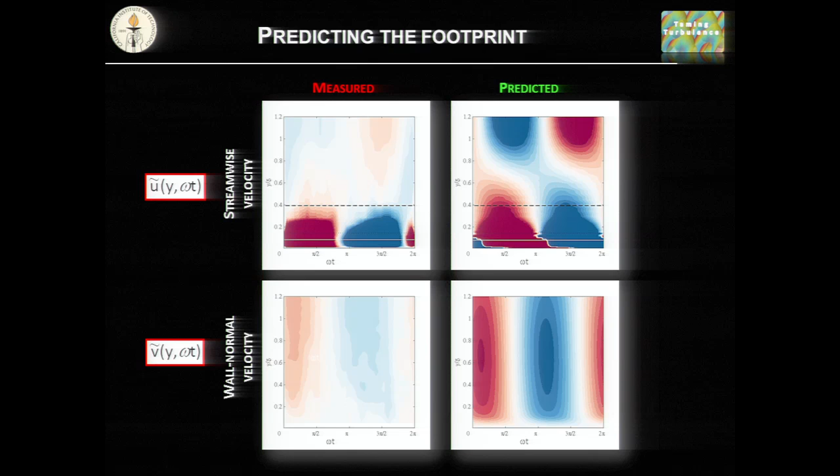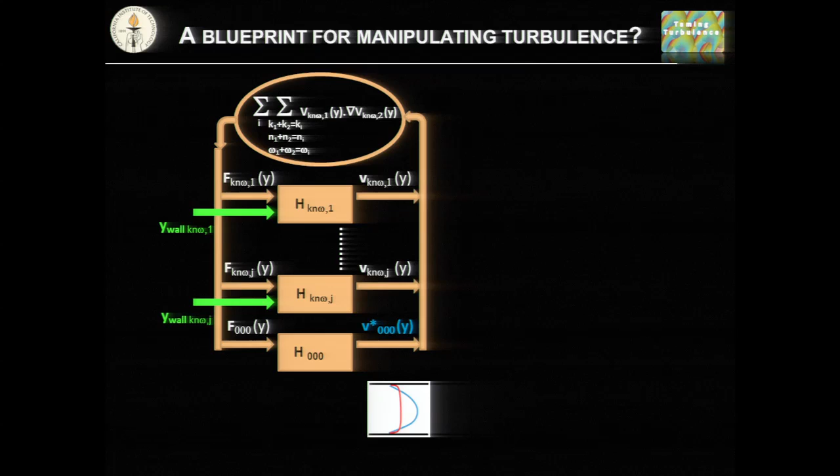So what does this give us? A blueprint for getting to skin friction. I told you this little transfer function controls the mean velocity. If I don't do any forcing on the flow, I get the red curve, this turbulent mean profile. This formulation lets me say I don't want that — I want the blue one, something close to the laminar profile, or something with reduced skin friction. And I can back out what forcing I need to put in at the wall, or in another way, to sustain that particular profile.

That's pretty powerful. I won't have time to tell you too much about exactly how we do this — suffice it to say the fluid mechanics appears to be the hardest part. I have wonderful colleagues at Caltech who can tell me how to make things like these little very thin metallic films that buckle on demand and would put in this sort of perturbation.

So let me wrap up now and say a little bit in conclusion. Have we tamed turbulence? Well, I showed you this mass of intertwined, or intertangled, vortices associated with a direct numerical simulation. I would say that's the full, untamed turbulence.

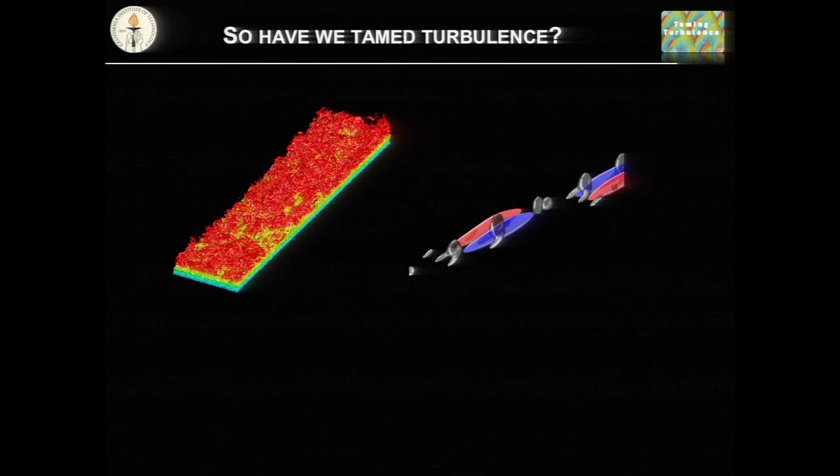I've shown you that we've been able to break down turbulence into component parts, put them together, play with them, manipulate them individually, and see how that relates to the rest of the system. So that's a little bit more friendly, but there's always a little snarl at the end. I hope you've taken away from this talk that turbulence is, A, everywhere, and B, a significant drain on our resources and our environment, and something we really ought to be able to do something about. But it's hard. I've shown you some of the steps we're taking towards doing that, and hopefully in a few years I'll be able to update you and tell you that we've done it.